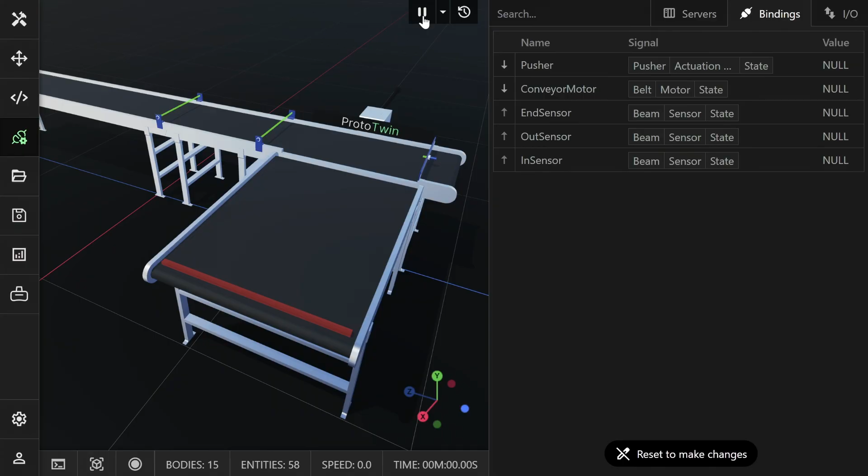In this short video, I'm going to demonstrate how you can connect ProtoTwin to an Allen Bradley Micro 800 series PLC for virtual commissioning or controls testing. The machine we'll be controlling is a simple pallet layer former. There are three inputs, consisting of three sensors, and two outputs, used to control the conveyor motor and pusher.

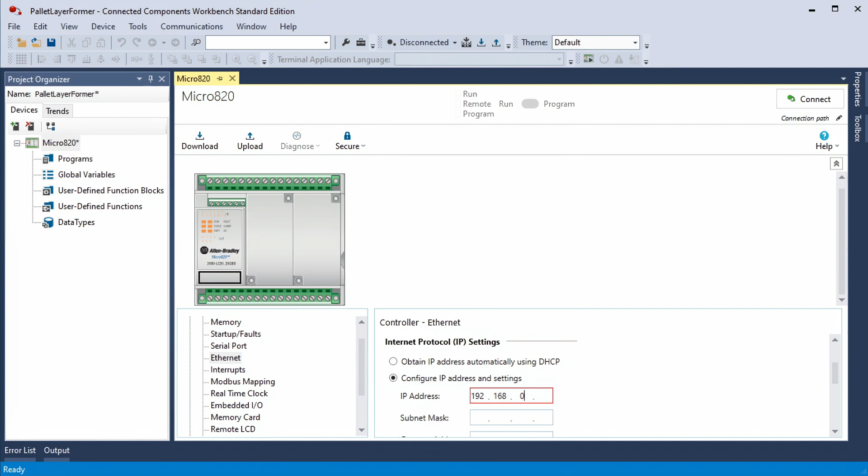Let's get started. We'll first create a new project in Connected Components Workbench and select the specific model of the PLC we're going to connect to. Next, we just need to enter the IP address for the controller under Ethernet settings. Okay, let's first create all our tags as global variables. For the Micro 800 series PLCs, ProtoTwin can only read and write global variables. We'll create tags for the three sensors, the conveyor motor, and the pusher. Leave the data type as Boolean for all the tags.

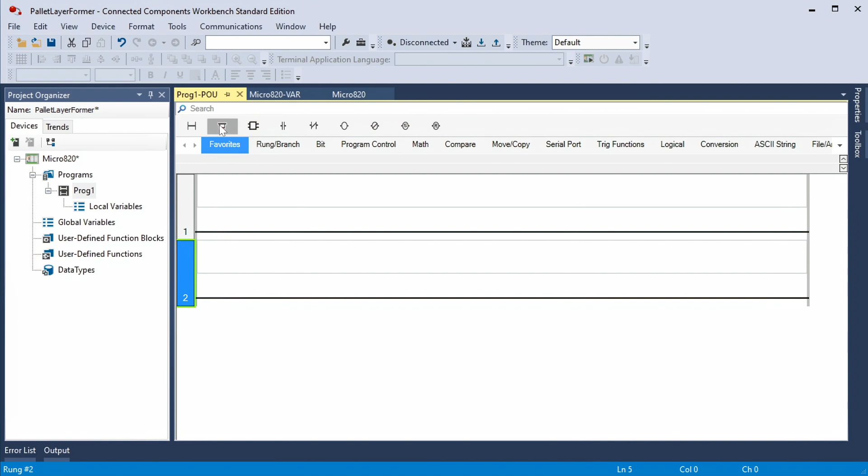It's now time to create the logic for our program. I'll use ladder logic for this example. The program is really simple. We switch on the conveyor motor whenever the in sensor or out sensor are blocked. This creates a slug of boxes, which then travels to the end stop, blocking the end sensor. We actuate the pusher as soon as the end sensor is blocked, but we use a timer off delay to wait 1 second after the end sensor has been cleared before retracting the pusher.

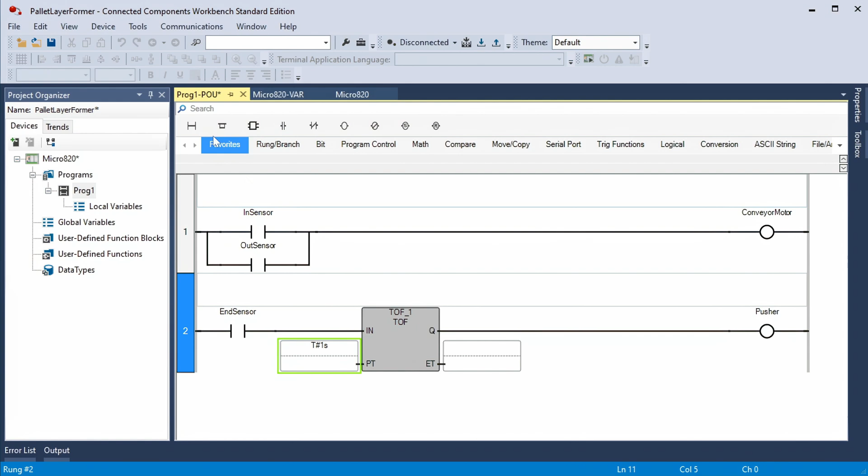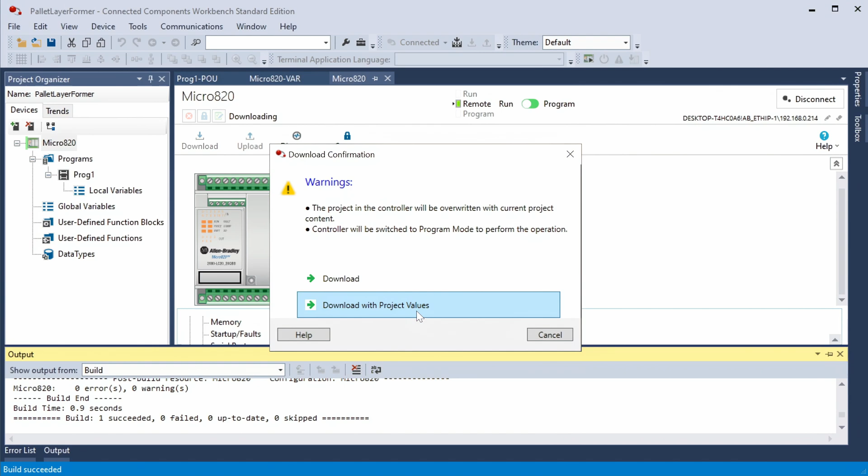Okay, we can finish things up in Connected Components Workbench by saving and downloading the project to the controller. Select the device on the local network and select to download with project values. Be sure to change the controller to run mode once the download has completed. Alright, the program is now running on the controller.

Let's switch over to ProtoTwin so that we can set up the connection to the PLC using the EtherNet/IP protocol. The CAD for this model was created in Onshape and imported directly into ProtoTwin. I've already added components to the various parts of the model. If I switch to the script editor, you'll see that there are no scripts. The machine will be controlled entirely by the PLC.

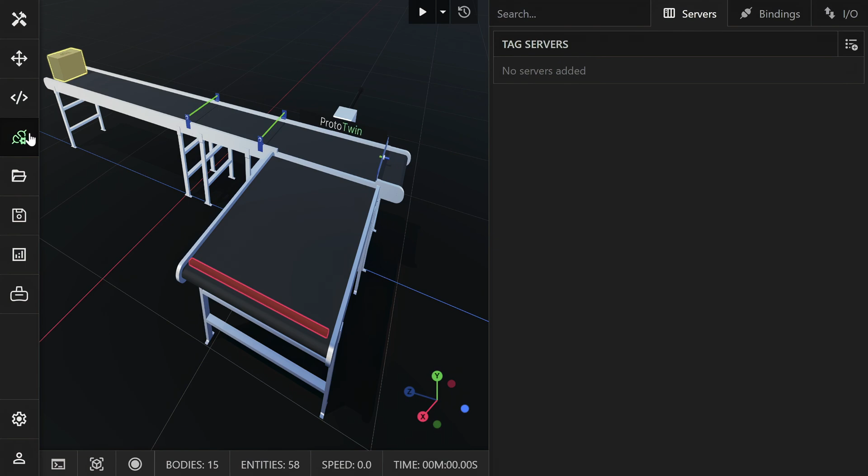Okay, open the I/O browser and click the button to add a new tag server. Switch to the Discovery tab and select the appropriate PLC on your network. Review the configuration and click Save. Select the server and then click the button to import all the tags directly from the PLC. You'll see that all the tags for the physical I/O were imported alongside the tags we created. We won't be using them, so I'll just go ahead and remove them from the list.

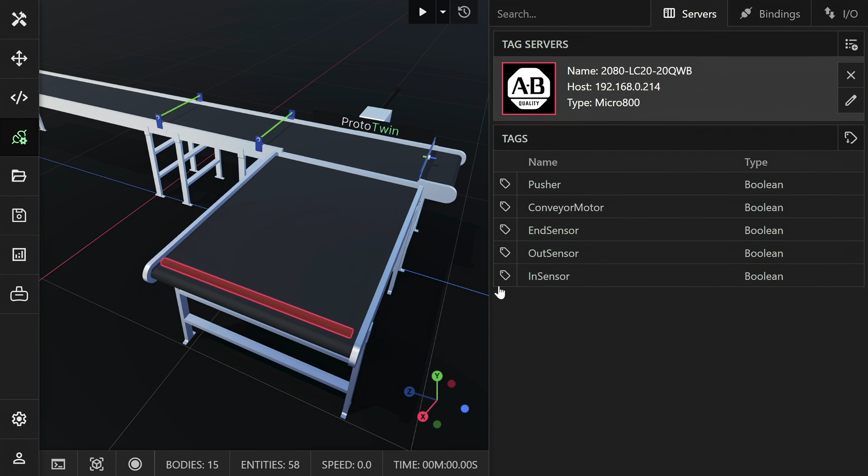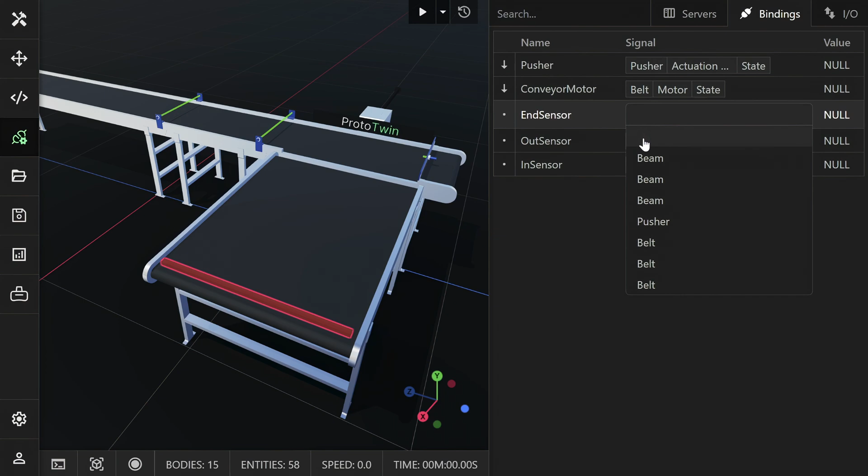We'll now bind the tags to the appropriate signals in the model. Hold the Control key and click the button to the left of each tag to quickly create the bindings. Switch to the Bindings tab and configure all the bindings that we just created. We do this by selecting the signal that is to be bound to each tag. You specify the signals by first selecting the entity, then a component attached to that entity, and finally, a property of that component. Note that entities are highlighted in the viewport as we hover over them. You can use this to easily identify the correct entity.

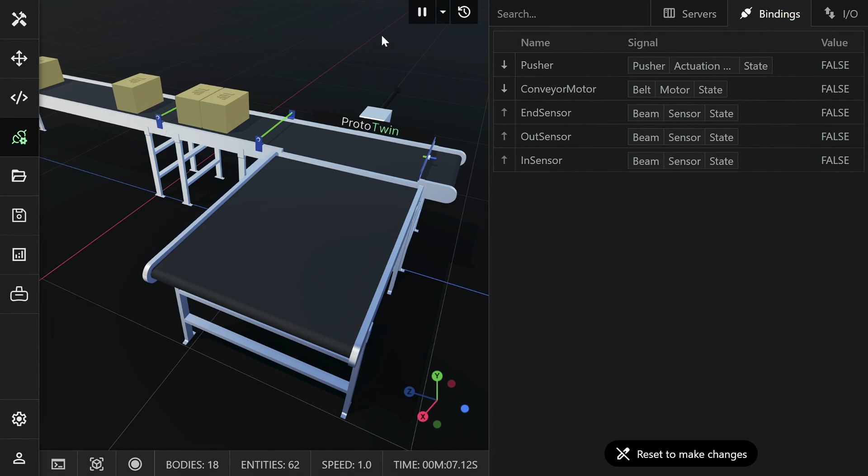Okay, we're done. You can switch to the Servers tab to manually connect to the PLC. Alternatively, if you run the model, ProtoTwin will automatically connect. You can monitor the values of all the bound tags in the I/O browser. ProtoTwin exchanges data with the PLC according to the scan rate, which can be changed at any time by editing the server configuration. We use a 50 millisecond scan rate by default, but you can set this as low as 0, which will cause the tags to be read and written as quickly as possible.

ProtoTwin can achieve latencies as low as 1 to 2 milliseconds, depending on the capabilities of the PLC and the protocol, enabling precise control of fast-moving machinery. You can connect to most Rockwell Automation Allen Bradley PLCs, including all ControlLogix, CompactLogix, MicroLogix, and Micro800 series PLCs that support the EtherNet/IP protocol.